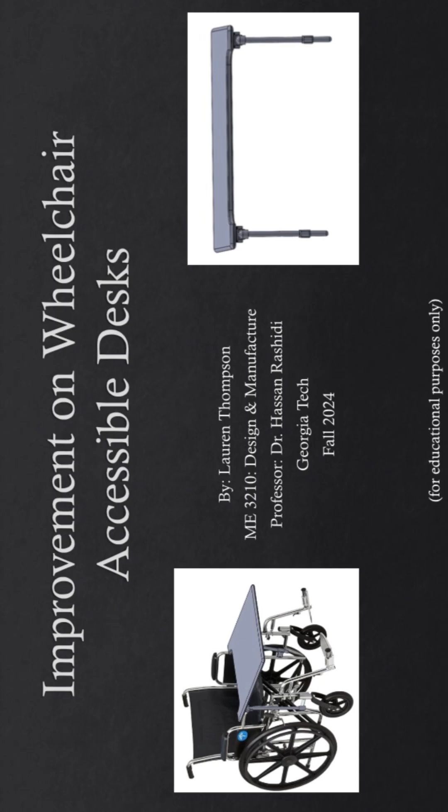This is my design for an improvement on wheelchair accessible desk attachments. Imagine this scenario. You are a handicapped student and you walk into the first day of class to see that all the chairs look like this. They automatically have desk attachments that cannot be taken off. There is not a singular table or regular desk for you to sit at. You would need to request an additional accommodation or else there would be no place to write. This is inconvenient and could potentially cause someone to be uncomfortable.

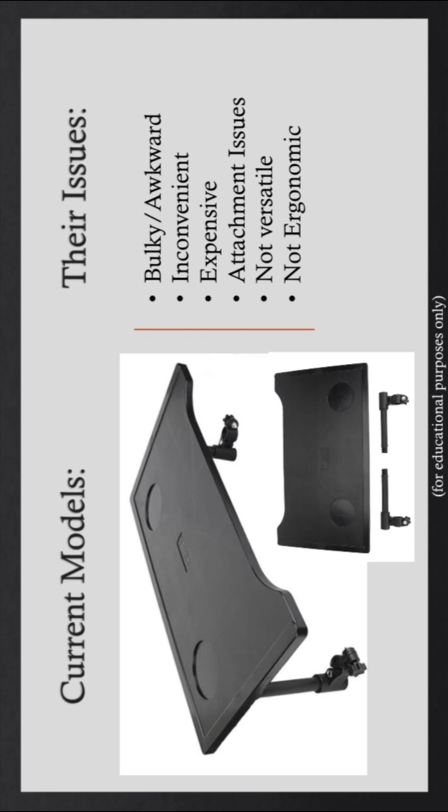While there are some current models of handicapped desk attachments, most of them have a lot of flaws. For example, this current model is not versatile, not ergonomic, and has attachment issues, and additionally is inconvenient. The only way to collapse this model to make it transportable is to unscrew the posts that connect to the wheelchair arms. Additionally, how is a student who will already be having their backpack on their lap and wheeling themselves around be able to transport this desk attachment as well?

Similarly, this model velcros onto the wheelchair arms. This model is additionally bulky and awkward, would be extremely hard to carry around, and might not fit all wheelchairs. Therefore, this model is also inconvenient, awkward, not versatile, not ergonomic, has attachment issues, and this also is a $50 model. Because of these issues, I am proposing a new solution.

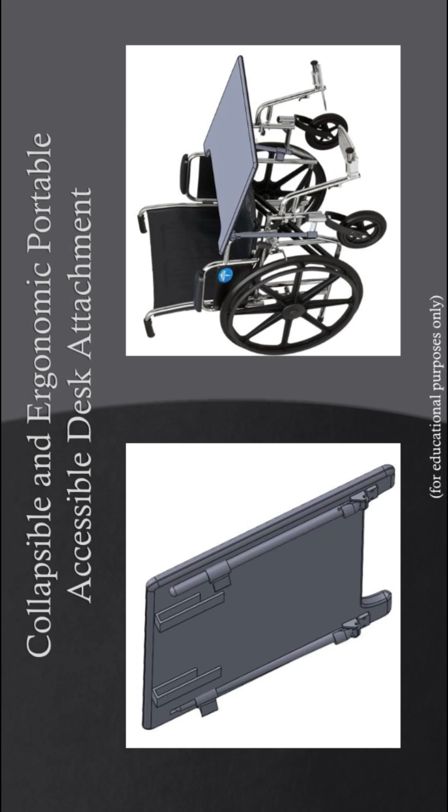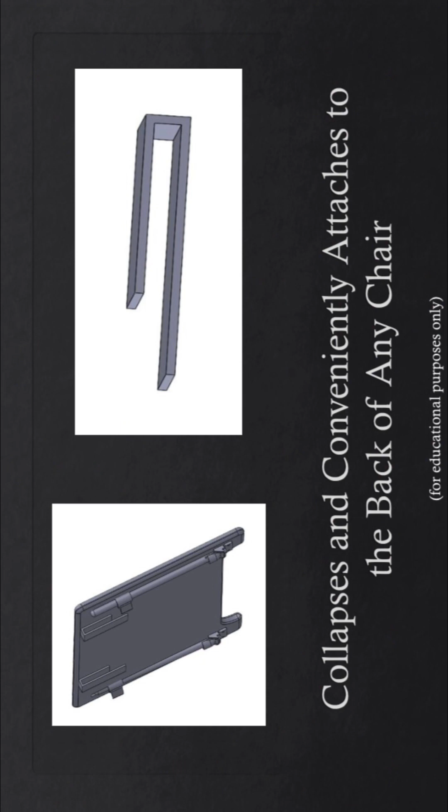I have redesigned a collapsible and more ergonomic, portable, accessible desk attachment. What sets my redesign apart is the ability to conveniently collapse and attach this desk to the back of any wheelchair. Let's take a look at some specific improved features with detailed descriptions. The desk comes with a new feature that allows it to attach to the back of any wheelchair. This is a close-up of that feature on the bottom of the desk.

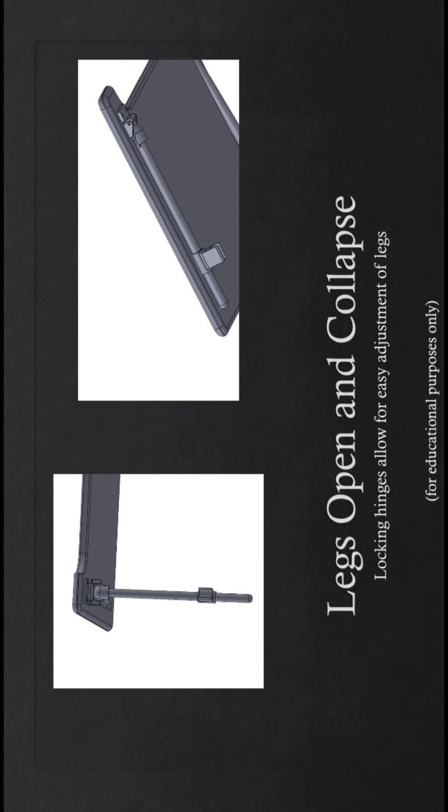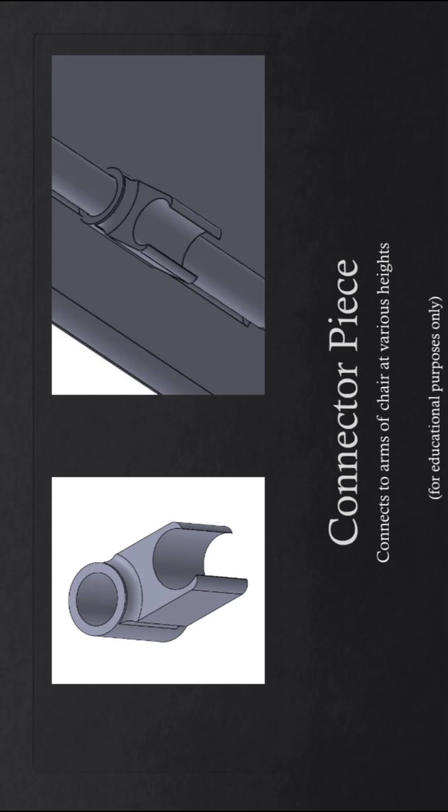Locking hinges allow for the legs of the desk to open and close. This allows the desk to become easily transportable and collapsible. Here is what those legs look like, both opened and closed. Lastly, a connector piece that assembles onto the legs is height adjustable and can therefore attach to a variety of different arms on wheelchairs. Here are some final views of my redesign from the side, where you can see the entire assembly together, as well as a top view.

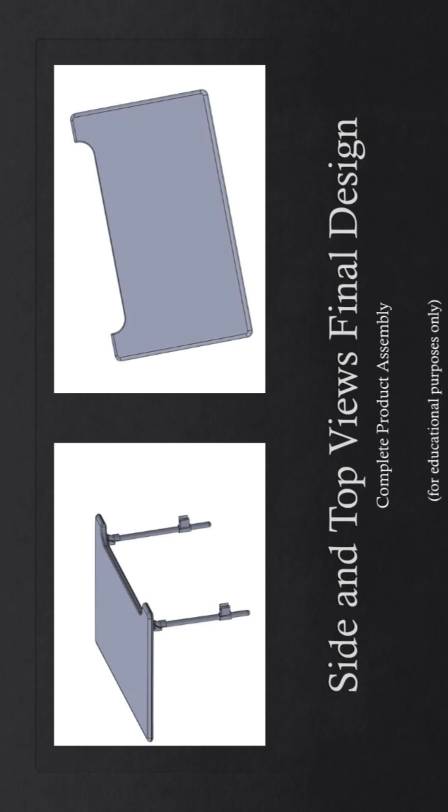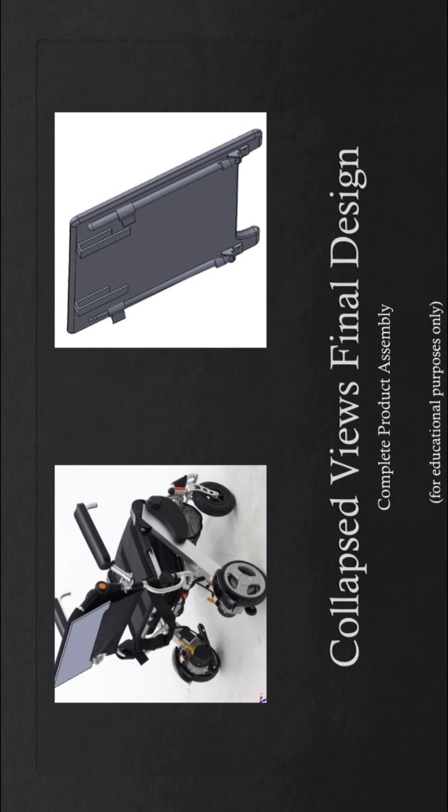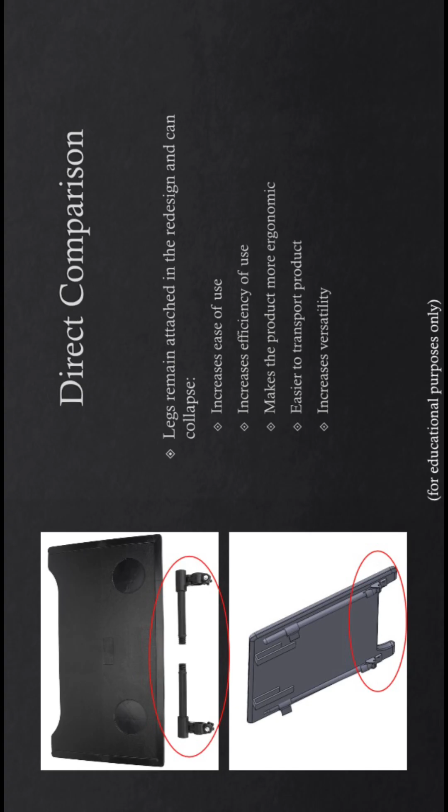I have provided a rendered image of what this desk attachment might look like on a real-life wheelchair. Here is a rendered view of the collapsed version of my redesign conveniently attached to the back of a wheelchair. Now let's look at a direct comparison of the legs of my redesign and the legs of one of the designs already implemented. Rather than having the legs attach and detach and be a burden to carry around, my legs are able to swing up and down to collapse while staying attached via the locking hinges.

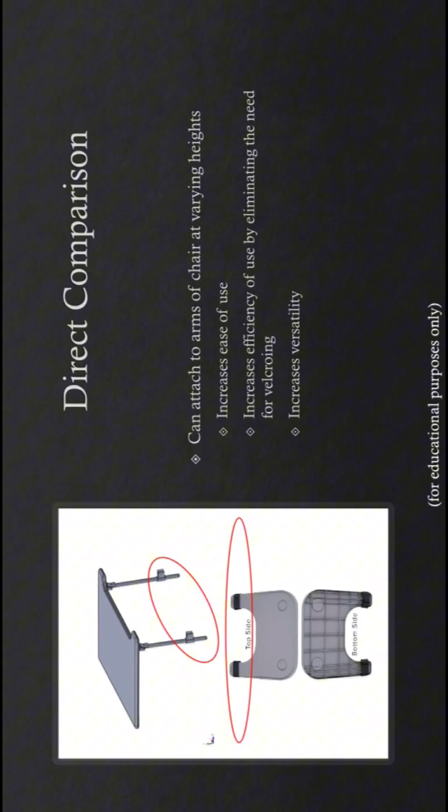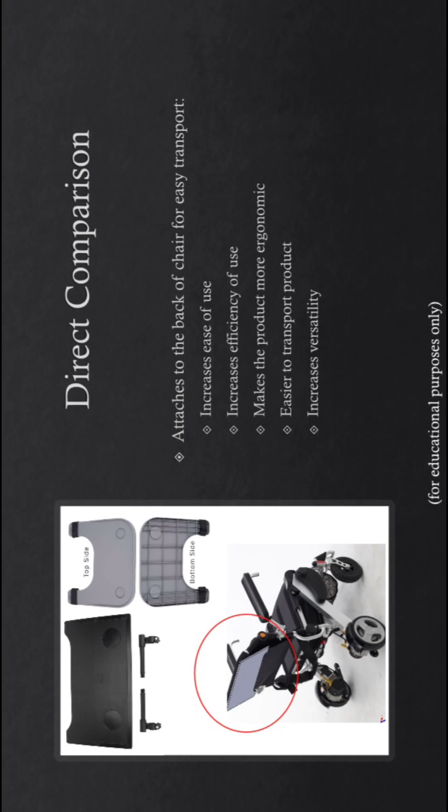Now let's compare the redesign attaching mechanism to the second design I showed. The second design velcros on the wheelchair's arms. This is bulky and awkward to transport and a burden to attach. The redesign is significantly easier to attach using the newly designed connector pieces. For another direct comparison, it is evident that the models that already exist do not have an easy way to be transported. My redesign easily attaches to the back of any wheelchair. This increases efficiency of use, makes the product more ergonomic and easy to transport.

To reiterate some of the specific benefits and advantages of my redesign, it is more ergonomic, increases ease of use and convenience, improves accessibility, can be used for a wider variety of applications, is easier to transport, lightweight, and increases comfortability for the user. Let's expand the scope of application for my redesign.

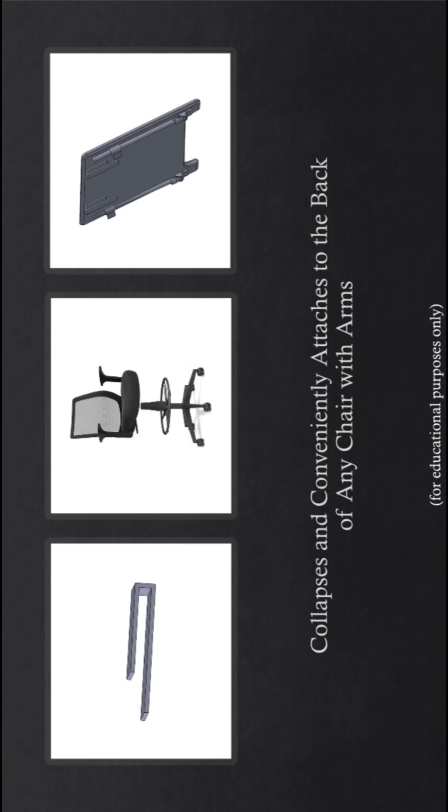Not only can my redesign be implemented on a variety of different wheelchair types, it can be implemented on a variety of different chair types as well. As you can see by the middle image here, my redesign would fit perfectly on the back of this chair, and then can be used as a desk for anyone.

Here is another example of a chair that this desk attachment would perfectly work on. Notice how my redesign would easily be able to attach to the arms of this chair, as well as collapse and attach to the back of this chair.

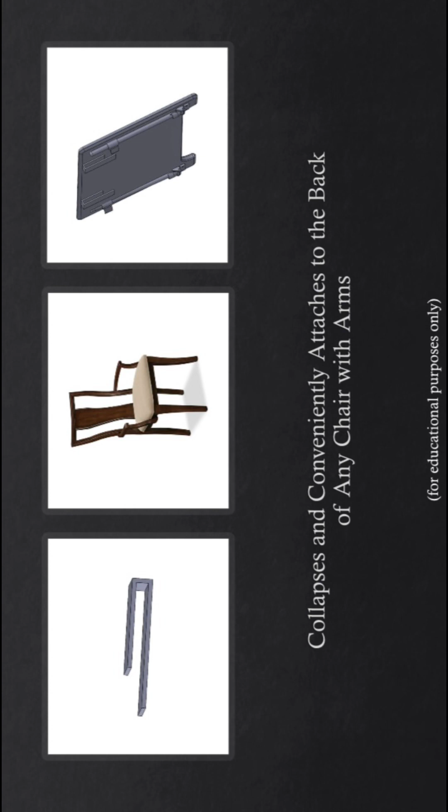Additionally, it is worthwhile to note that any person at any time may experience a lower body injury that might subject them to be temporarily in a wheelchair. Therefore, my redesign is highly versatile and can be used by anyone in a variety of different situations.

Now I can discuss the manufacturing processes and materials used to create this redesign. First and foremost, this design needs to be lightweight and durable. Therefore, the majority of the components will be made out of plastics. The top of the desk will be made out of plastic ABS.

It will be produced via injection molding because it is good for high volume production, complex geometry, allows for smooth finishes, consistency. Large molds are possible with injection molding. Injection molding is additionally cost-effective and efficient.

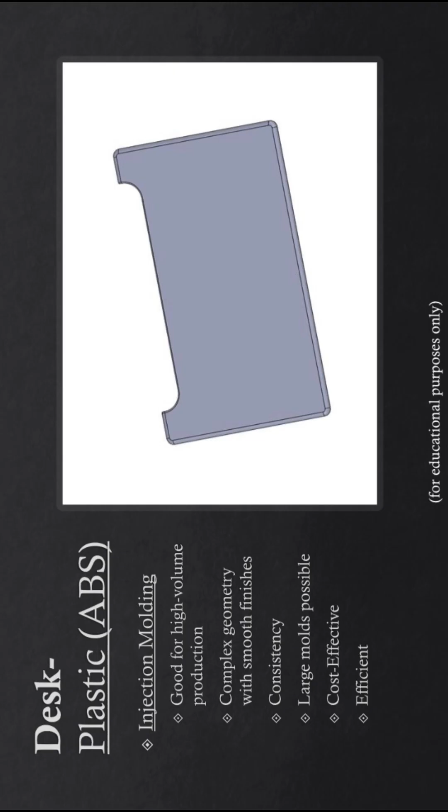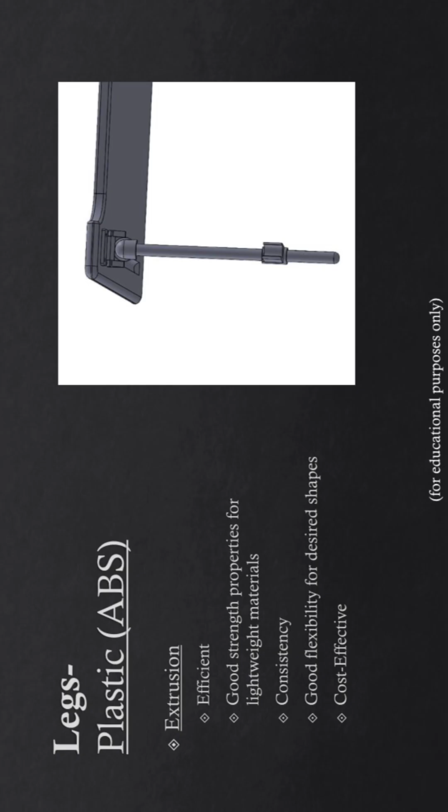The legs will also be made out of plastic ABS using an extrusion approach. Extrusion is efficient, it has good strength properties for lightweight materials like plastic, it is also consistent, it has good flexibility for desired shapes, and is a cost-effective process.

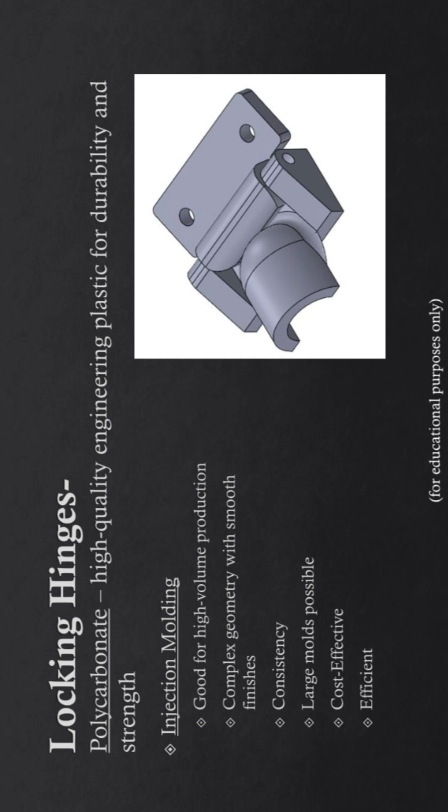The locking hinges will be made out of polycarbonate because they need to be a high-quality engineering plastic for durability and strength purposes since these are dynamic elements. Injection molding is the best process because it is good for high volume production, complex geometry with smooth finishes, consistency, has large molds possible, is cost effective, and efficient.

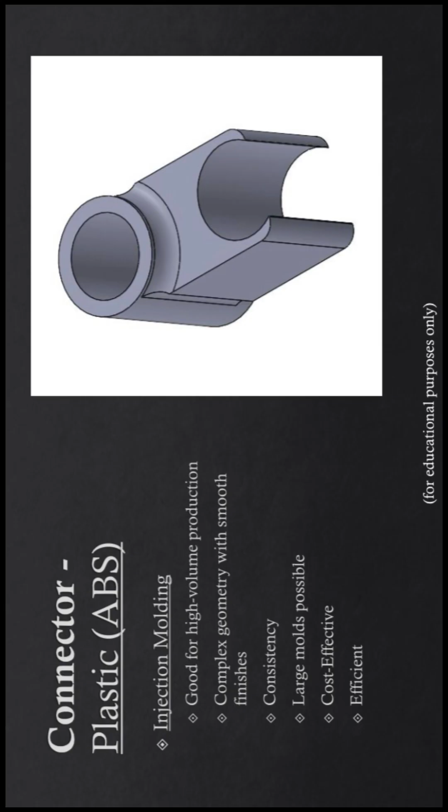Lastly, the connector pieces for the arms will also be made out of plastic ABS via injection molding, because injection molding once again is good for high volume production, complex geometry with smooth finishes, consistency, is cost effective and efficient.

In order to assemble the different pieces, plastic fasteners and rivets for pre-modeled holes can connect the pieces together. Plastic fasteners and rivets are easy to use, lightweight, cost-effective, efficient, consistent, and good for high-volume production.

Before finishing up, it is crucial to mention the possible redesign disadvantages. These disadvantages include potential issues with longevity and durability due to the use of plastic components. Additionally, this design is applicable to many wheelchair types, but it might not be universally applicable to all.

There may be stability concerns when it comes to putting stress on the legs and supporting unevenly distributed loads due to the design of the legs and the use of plastic. The connector pieces may additionally be a less stable form of attachment, and lastly, the redesign may have poor aesthetics due to the use of cheap plastic.

The resources I used for this project include Manufacturing Processes for Engineering Materials by Kalpakjian and Schmid, and various lectures by the course instructor Dr. Rashidi. I would once again like to remind you that this project and presentation is for educational purposes only.